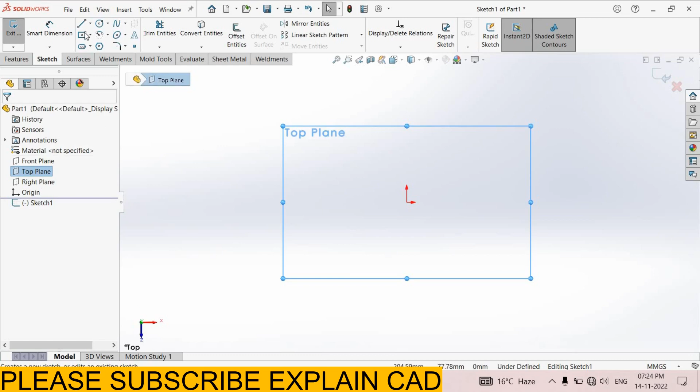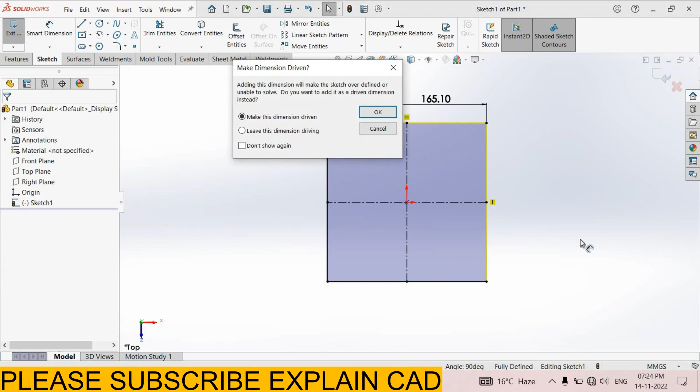For that, I select top plane, sketch, normal. I will select rectangle command, center rectangle, draw one rectangle here. Right click, select option, smart dimension. This side, dimensions 165.10. Right click, select option, select this line and this line. Make equal. Our sketch is fully defined. Come back from the sketch.

Features, extruded boss base feature and extrude it up to 50.8. Select OK.

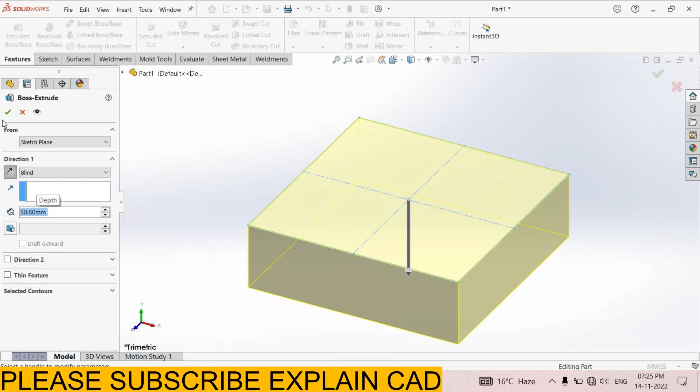Now select this face, sketch, normal, select circle command, draw one circle here, right click, select option, smart dimension, diameter of this circle 80 mm, right click, select option, come back from the sketch, features, extruded boss base feature and extrude it up to 52 mm.

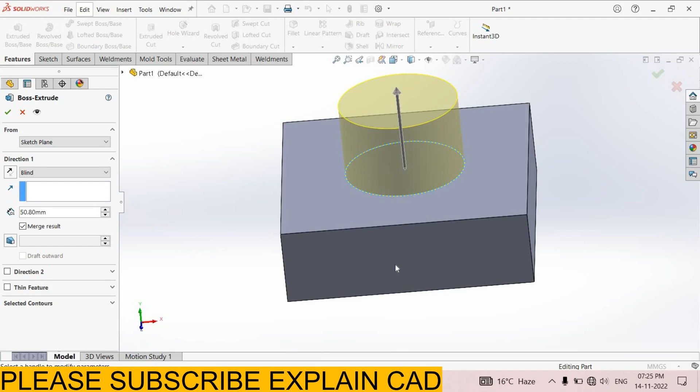Select OK. Now select this face, sketch, normal, select circle, draw one circle here, right click, select option, smart dimension, diameter of this circle 64 mm, right click, select option, come back from the sketch, extruded cut up to 28 mm, select OK.

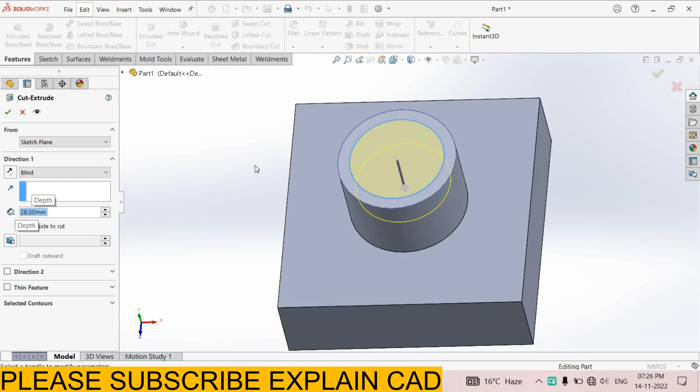Now select this face, sketch, normal, again select circle command, draw one circle here, right click, select option, smart dimension 60 mm, right click, select option. Extruded cut. From here select offset 28 mm, reverse direction up to 22 mm. Select OK.

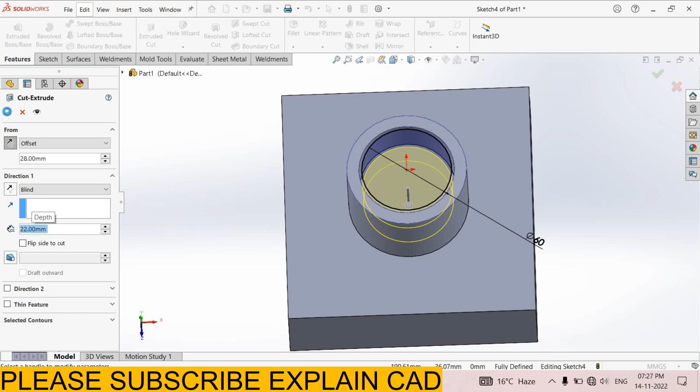Now select fillet command, apply fillet at each corner of this part, fillet dimension 3.18, select OK.

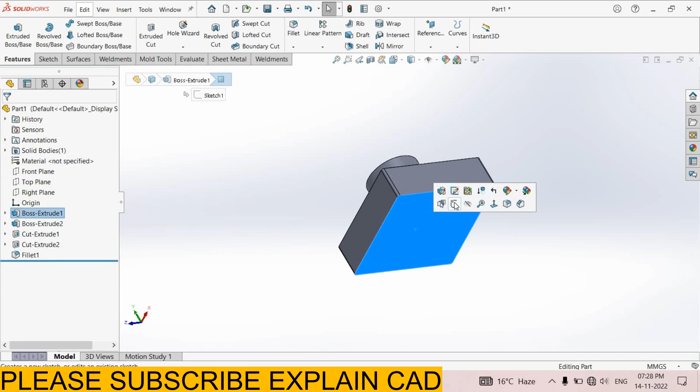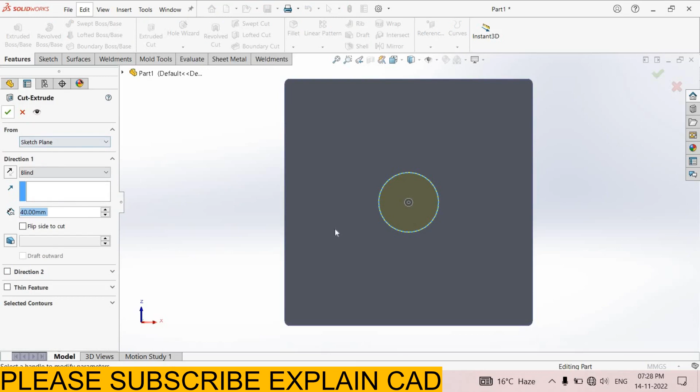Now select its bottom face, select sketch, normal, select circle command, draw one circle here, right click, select option, smart dimension, diameter of this circle 40 mm, right click, select option, come back from the sketch, features, extruded cut it up to 40 mm, select OK. Again select this face, sketch, normal, select circle command, draw two circles here, right click, select option, smart dimension, outer circle diameter

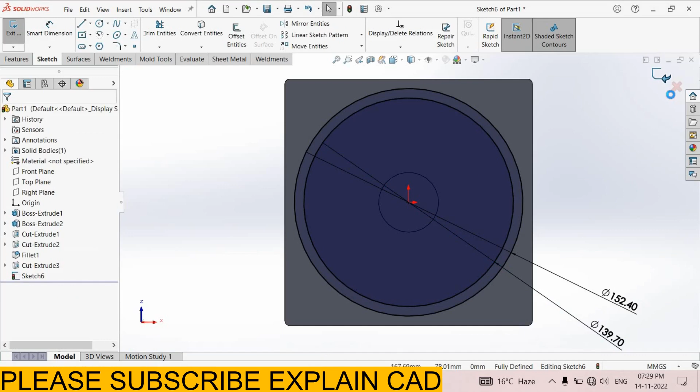Outer circle diameter 152.4, inner circle diameter of this circle 139.7, right click, select option, come back from the sketch, extruded cut up to 8 mm, select OK. Now select this face, sketch, normal, select center line,

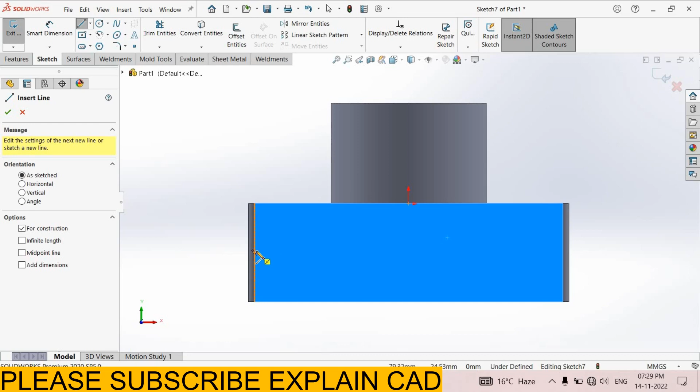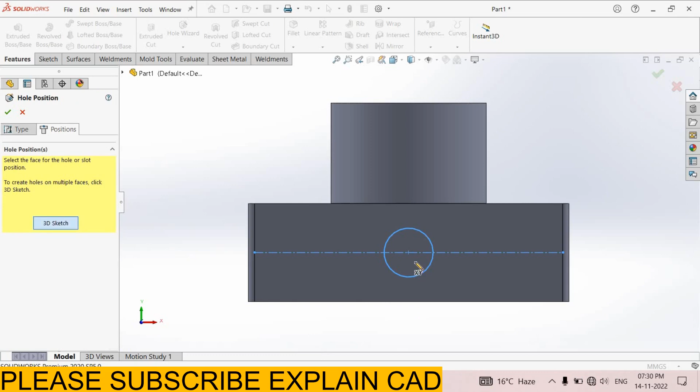Draw one line at the center point of this edge to this edge, right click, select option, select circle, draw one circle here, right click, select option, come back from the sketch, go to hole wizard, select tapped, standard ANSI, straight pipe threaded hole, size 1/2, 14 NPSM, blind. These are the default values. Select position, 3D sketch, select this point, select OK.

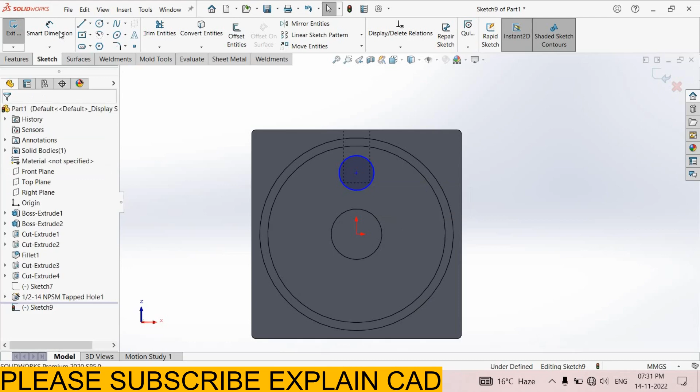Now select this sketch, select hide. Now select this face, sketch, normal, select circle command, draw one circle here, right click, select option, select the center point of this circle and the origin, make vertical, diameter of this circle 12.70, distance from here to the center of this circle is 32 mm. Right click, select option, come back from the sketch, extruded cut, from here select up to next, select OK.

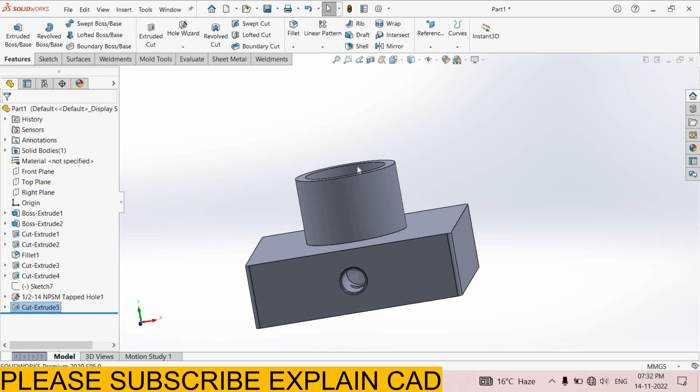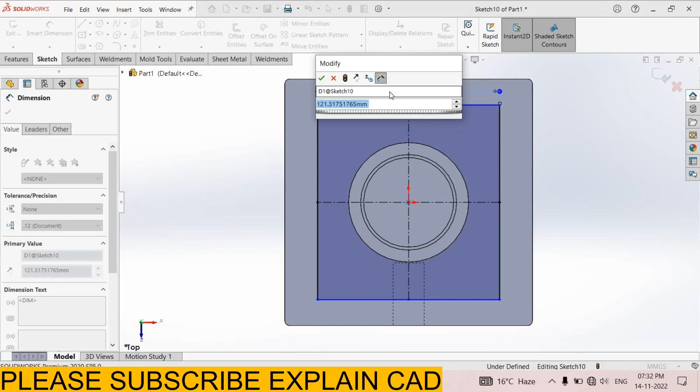Now select this face, sketch, normal, select center rectangle, draw one rectangle here, right click, select option, dimensions of this rectangle 123.73, this side 123.73, sorry 79, this is also 79, 123.79. Right click, select option, click inside the rectangle and make it construction geometry.

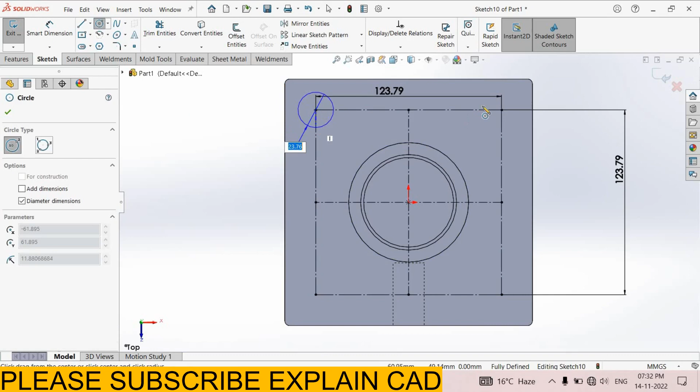Select circle command, draw 4 circles at each corner of this rectangle. Smart dimension, diameter of this circle 12.70. Right click, select option, select this circle and all these circles. Select all circles by press and hold control button and then select make equal. Select OK. Our sketch is fully defined.

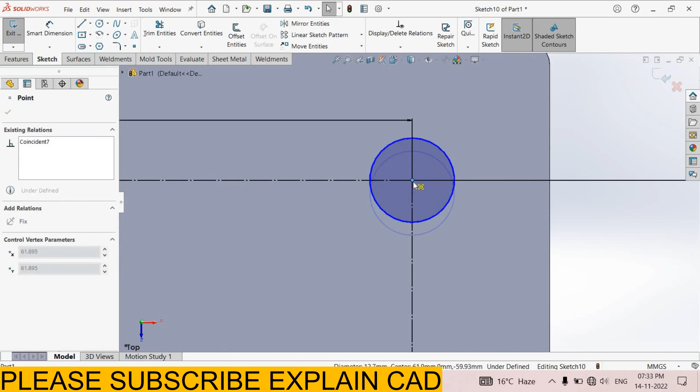We have to move this circle from here to this point. Now sketch is fully defined. Come back from the sketch, extruded cut, select through all, select OK.

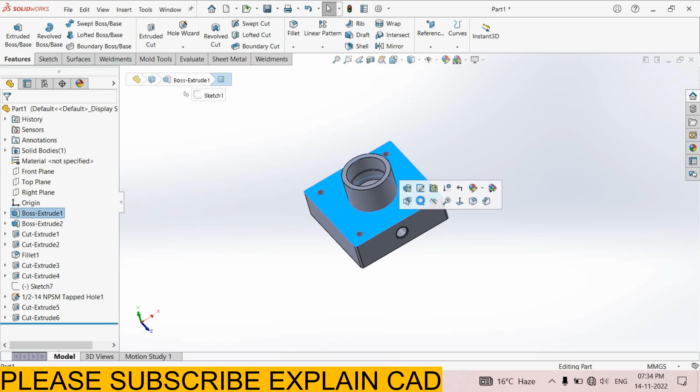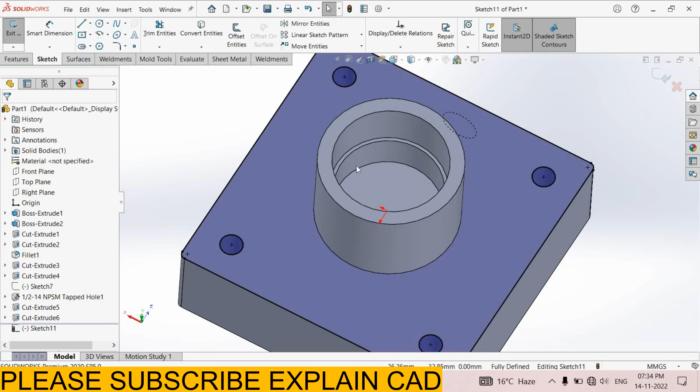Now select this face, sketch, normal, select convert entities, select all these, select these circles, convert entities. Come back from the sketch, features, extruded boss base feature and extrude it up to 19.05. Select OK.

This is the top cover of this pneumatic cylinder.